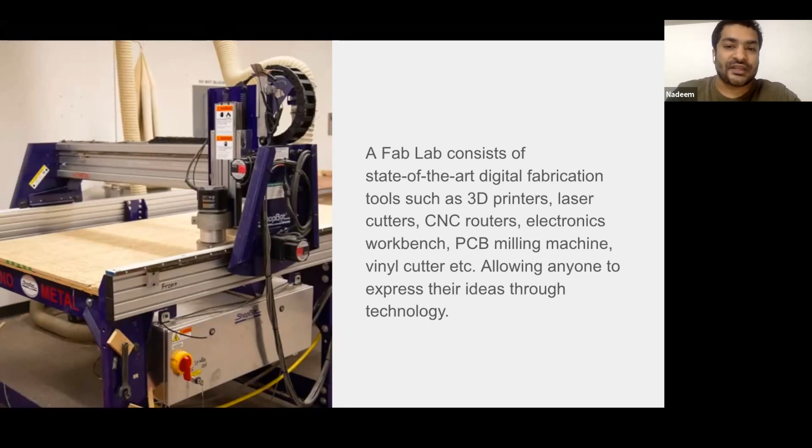As I said, the concept of Fab Lab is to take your idea, even if it's not for a commercial product or purpose. It can be anything — it can be your extra 20 hours project — and take it to Fab Lab and make it happen, make it into a real product.

As I said, we will repeatedly use the term personal fabrication, where anyone with minimal knowledge or training can come into the Fab Lab and make their idea into a prototype. As you may know, there are 1,750 Fab Labs around the globe right now, and each year it is growing exponentially.

Coming to our facility, Fab Lab Kerala — Fab Lab Kerala is an initiative by Kerala Startup Mission, which is a government nodal agency by the Kerala government to support startups. Coming to the network, we possess a bunch of categories of Fab Labs — we have mini Fab Lab and Super Fab Lab.

Before getting into it, let me take you through the journey of how we started Fab Lab. In 2015, in Kerala, in cities called Trivandrum and Kochi, we started two standard Fab Labs. Seeing the impact of that Fab Lab on makers, innovators, and startups, the government planned to extend the facility to 22 mini Fab Labs, which are right now in engineering colleges and polytechnics. It acts as a distribution hub for all the Fab Labs, and is also geographically distributed.

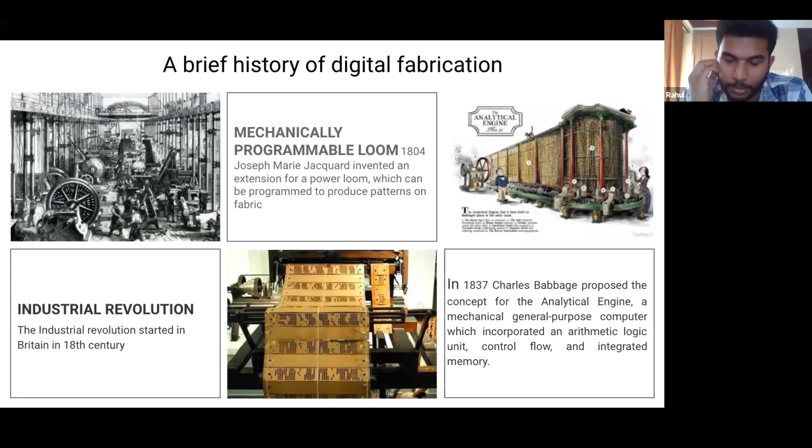Okay, so from Charles Babbage, who proposed the analytical engine, after some time in the 1800s, 1896 actually, Herman Hollerith realized that the holes punched on these punch cards could represent abstract information which could be stored electrically. So this is the first time electrical design, electronics, got involved in the running of machines. He went on to make the Hollerith tabulating machine, which later became IBM. So now the machines can be programmed and they can interact with humans.

Why not let the machines do the work for us? So that's why in 1949, in the Servomechanisms Laboratory at MIT, you can see the first milling machine, which was invented by John Parsons. During World War II, the aircraft components were getting increasingly complicated, so complex that even the most skilled person could not accurately make these curves. So what they did was tie a computer to a CNC milling machine.

Basically, the computer would read out information from a card and send pulses to the machine, and the machine would move in steps according to the pulse. So this was the first computerized milling machine there. And the first of these CAM softwares, as we know them right now, were called ATPs, automatically programmed tools. Now we've come a long way since then. Next slide, please.

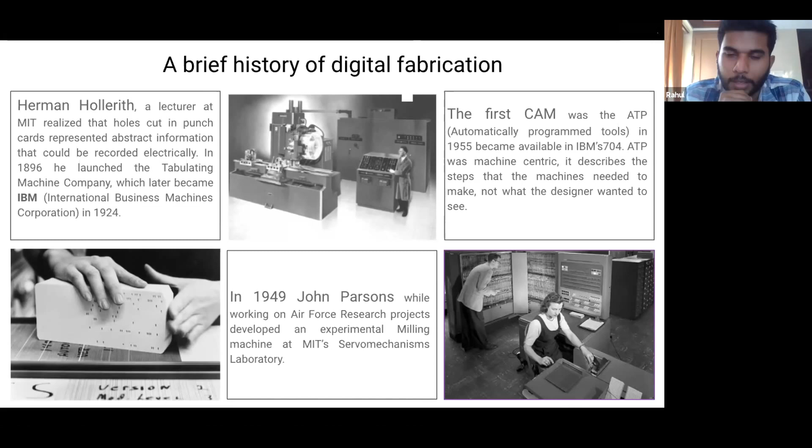So we jumped quite a lot in this picture from the automatically programmed tools, in which the last problem that occurred was: now that computers can take in information and move machines, how do we tell the machine what to do and where to go? That's where the entire CAM, or computer-aided manufacturing, process workflow comes from. In the 20th century, we crossed that threshold into digital fabrication. Basically, the entire workflow of designing and fabricating has gone into the digital realm. You're drawing on the computer, it processes that into machine code, and another computer runs the machine.

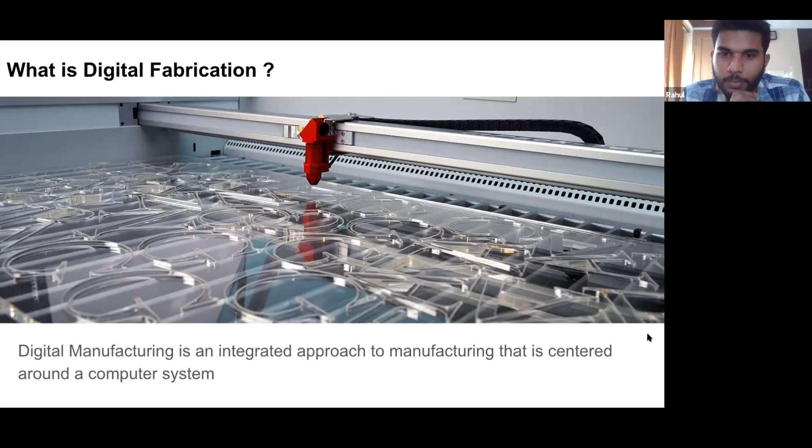In our present century, there are multitudes of tools controlled by computers. Look at any CNC machine and think of it like this: it's a machine that can move in certain axes, like X, Y, and Z, or the three rotational axes, and there's a computer to control it. What we put as the end effector, or the tool, defines what the machine is doing. It could be a 3D printer, a laser cutter, or a milling machine. So all these machines can be broken down into motion systems and things to control those motion systems.

The normal commercially available tools we have right now include the CNC milling machine, which has a rotating tool that can cut through wood or any material. Then we have laser cutting, which focuses a very tiny beam of light into the material to cut it out. So these are the two subtractive processes. The one that came very recently is additive manufacturing, in the realm of 3D printing, where you're not taking away parts, you're actually adding to it. This allows a whole new realm of possibilities, like creating impossible structures not possible by milling or other methods.

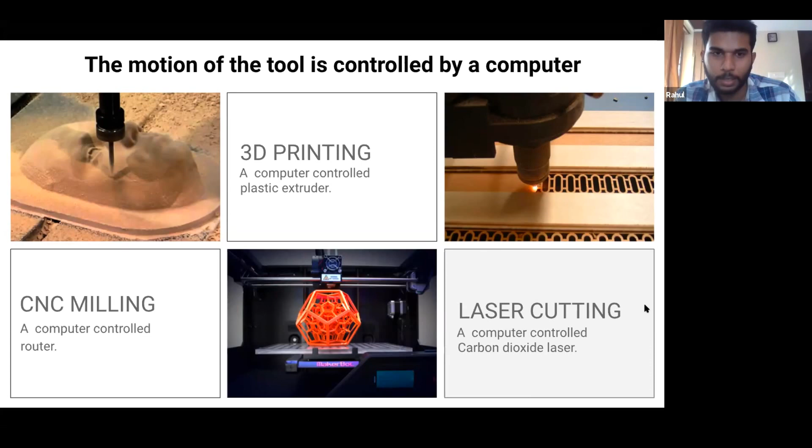These are the most common machines and manufacturing processes in rapid prototyping that we have right now. We're going to go over the machines later, but let me give you a brief of what these can do. 3D printing comes under the realm of additive manufacturing. Laser cutting is cutting by a focused beam of light.

Robotic machining can be additive as well as subtractive. There are people building rocket fuselage cones by 3D printing using a robotic arm, and there are building construction companies using robotic arms. So basically the robotic arm is just a motion system—depending on the type of tool you attach to it, you can do different kinds of jobs. A CNC machine, everybody knows that one.

The last one is water jet machining. Water jet machining actually started as a rough cutting process in the 1980s, but since the software technology has come a long way, we can actually predict the path of the water, so it's very accurate right now. It wasn't accurate until very recently, but now we can use very fine tolerances close to CNC milling tolerances with the water jet. Then there's atomic force microscopy, which comes in the realm of electron beam collisions, but I don't think it's practical for us.

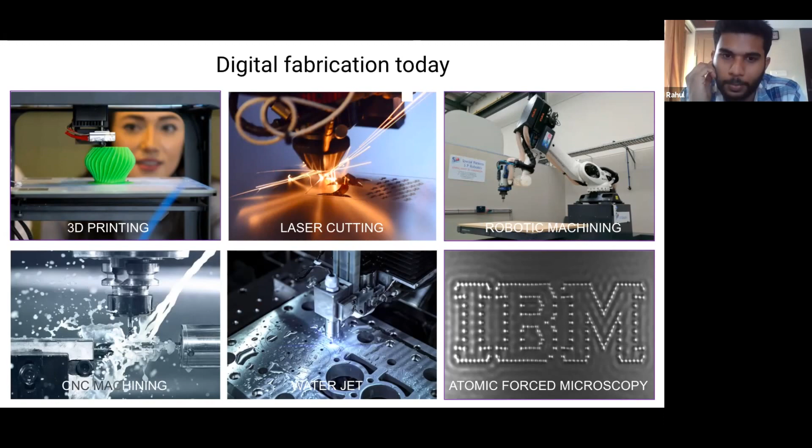So how are we going to tie all of this together? All of these machines are chosen in such a way that people with very minimal training can operate them. You only need access to a computer and some design skills, and there are softwares which can convert the design into machine code. So every year, from January till July, we run a course called the Principles and Applications of Digital Fabrication. This is globally known as the Fab Academy. There are more than 200, about 250, labs participating every year, and it happens from January till July.

In this course you're going to learn—we'll get into the details later, but roughly you're going to learn 3D printing, CNC machining, laser cutting. Also, what you can take out of this course is that you'll be able to see any kind of electronic equipment or any kind of physical product, and you'll be able to deconstruct all the steps.

Like this is made by this manufacturing, this is made by this. So if you have an idea you'd like to express and you want to do that through technology, then this is a course for you.

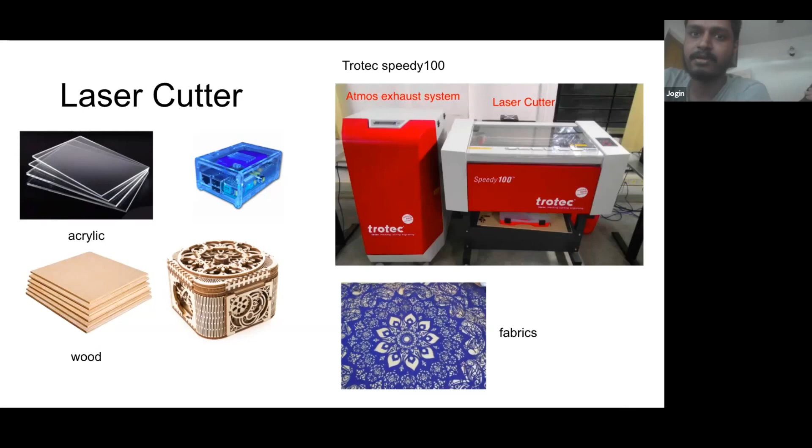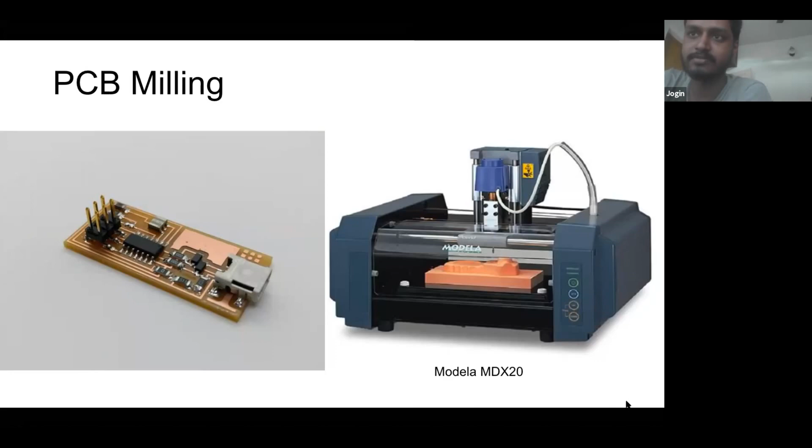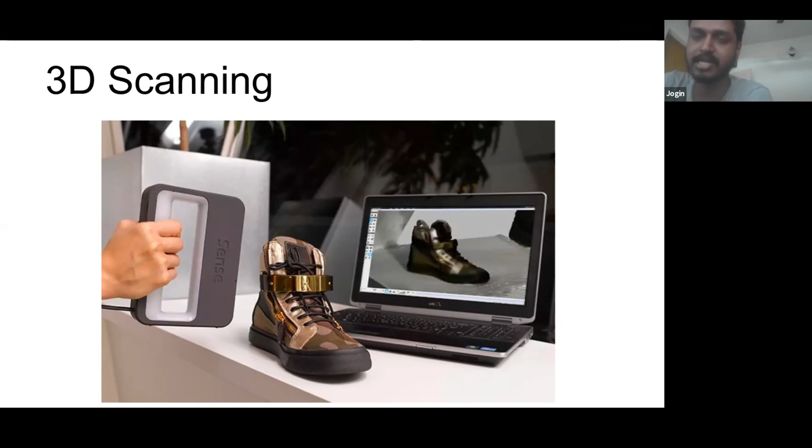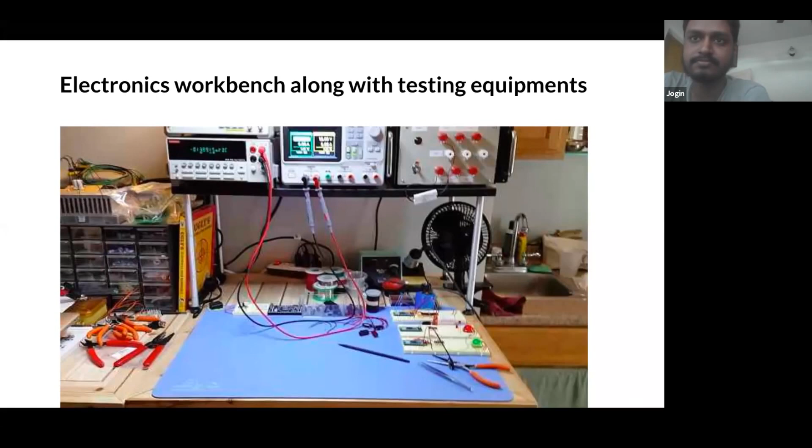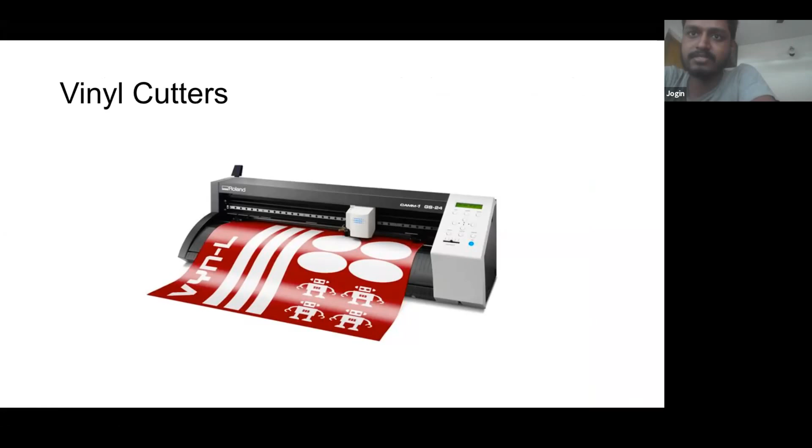So these are the basic machines that we have in our mini Fab Lab.

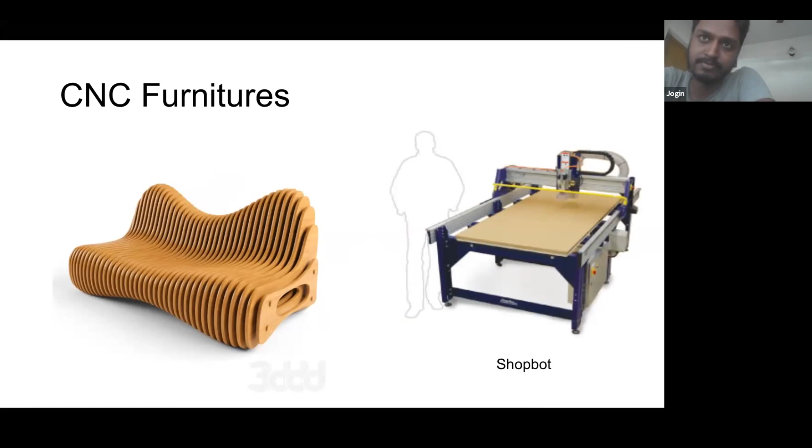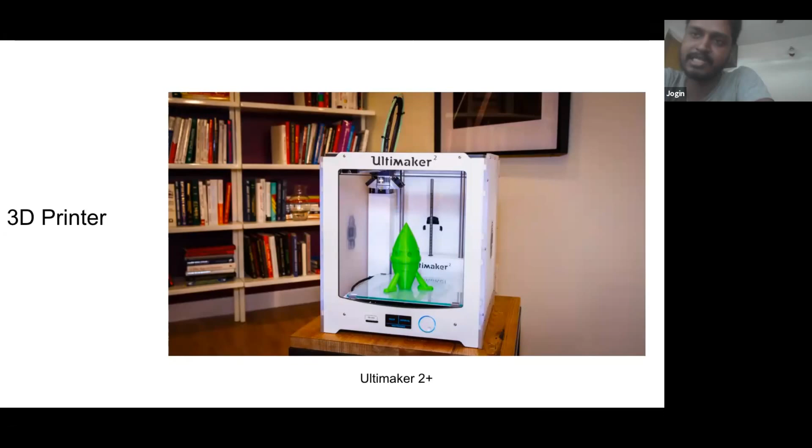Of course, there is a 3D printer, but that's just a basic 3D printer. This is a FDM type 3D printer, and it has got around 20 cm by 20 cm bed size, and can print just prototypes, what we call casings, etc. So this is a fused deposition modeling type 3D printer, and the material that we use is PLA.

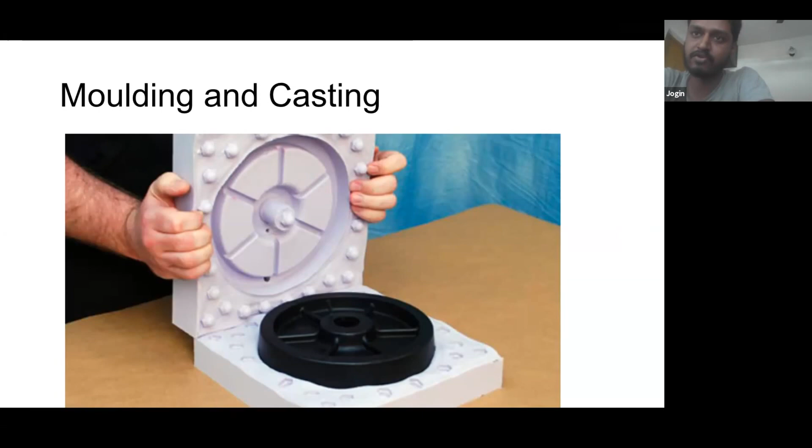Along with that, we have a facility with an inventory we could use. As I said earlier, we have a ShopBot for making what we call the molds, and we can use that mold to cast in our molding and casting facility. We have all kinds of resins, epoxies, etc. for making a mold or an output product.

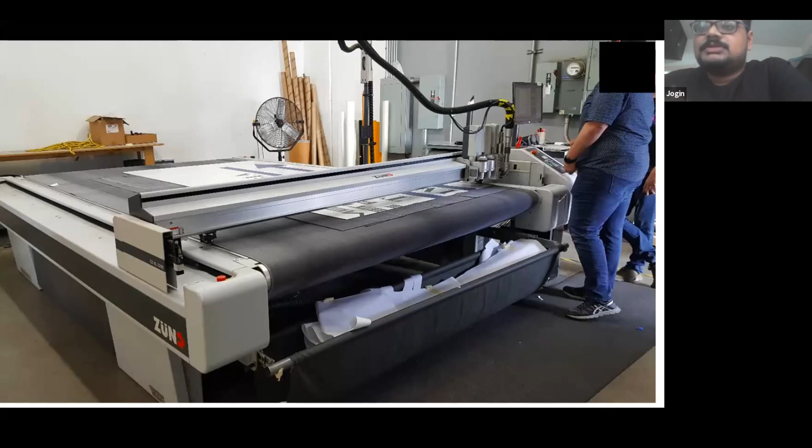This is called the Zund, a Swiss machine which is very capable in cutting. It's a subtractive manufacturing machine, meaning it subtracts material from the stock. One major advantage of the Zund is that it can have multiple modules inserted in the same machine. One module could be a routing module, which can route wood or plastic. One could be a creasing module, which can crease cardboard and make right angle bends. And one module could be a cutting module, which can cut cardboard, fabric, fiberglass or carbon fiber. The bed continuously feeds so we can input rolls of material like vinyl and fabric. This is a super fast machine.

The machine can accelerate up to 2 meters per second, which is super fast. The applications of these machines are usually for cutting plastics for enclosures or functional parts, cutting fabric for any purpose, cutting fiberglass, and most importantly for making packages out of cardboard and carton boxes, which can also be used for creating cardboard furniture. Rahul was working on some awesome ideas for cardboard furniture, but unfortunately we couldn't show it because we are not in the lab.

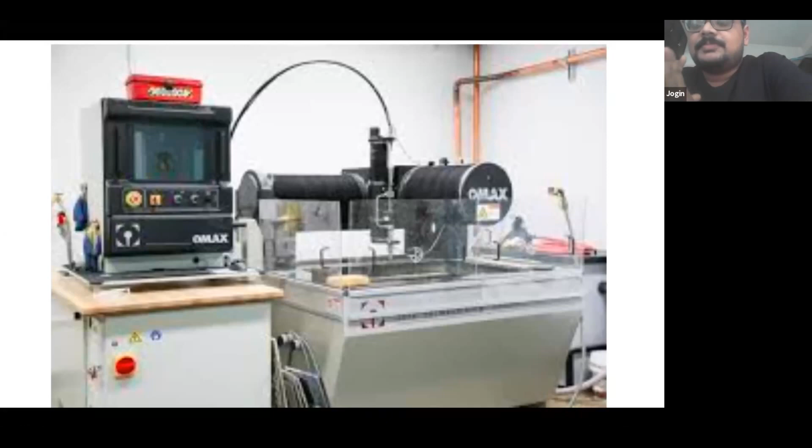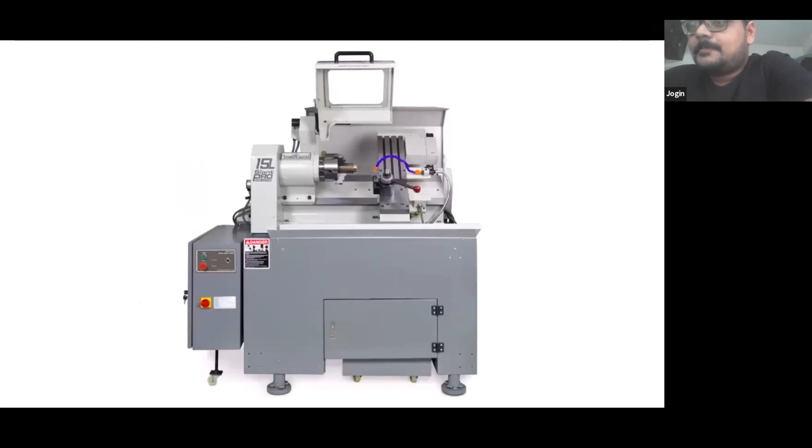Okay, next slide. This is actually a 2-axis CNC lathe. In the Fab Lab we have this small lathe for creating small parts, small shafts and flanges for connecting. This is a computer controlled CNC machine so you can add complex geometries inside the lathe pattern. In conventional lathing, you need to manually move the 2 axes by hand, but this is CNC controlled - you can directly input your CAD profile to the machine and it will automatically cut those patterns. Okay, go to the next.

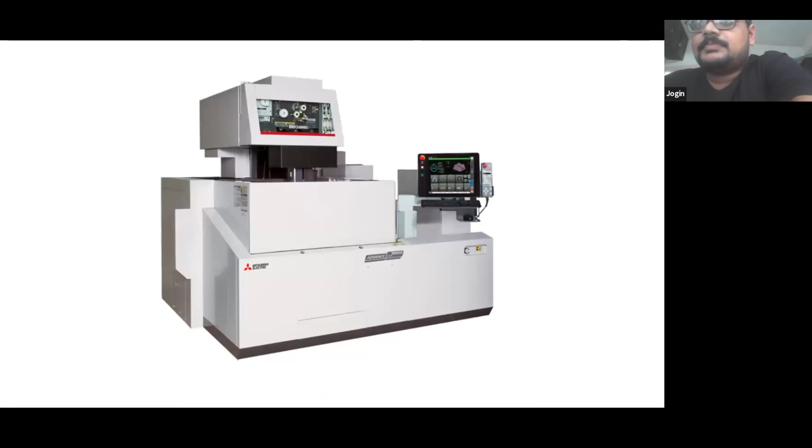So this is actually a wire EDM machine. I hope you might have heard about a wire EDM. So this is actually an electrical discharge machining tool.

There will be a high voltage conductor, and that conductor will act as the cutting tool. Whenever the conductor approaches the stock material, it creates an electric arc and creates plasma. The plasma will etch the material out of the stock material, and it creates a cutting profile on the stock material. So one of the disadvantages of a wire EDM...

comparing to the water jet is that you need to pre-drill the hole in order to get the wire inside the stock material.

Other than this, it's a pretty good machine because in water jet you have the problem of tapering, but since in wire EDM you are using a uniform wire, the accuracy you are getting will be independent of the height. So if you are cutting a 1mm sheet, or you are cutting a few centimeters height of sheet, the accuracy will be the same, because you are using a wire, and the wire will be etching from the stock material. So yes, move to the next slide.

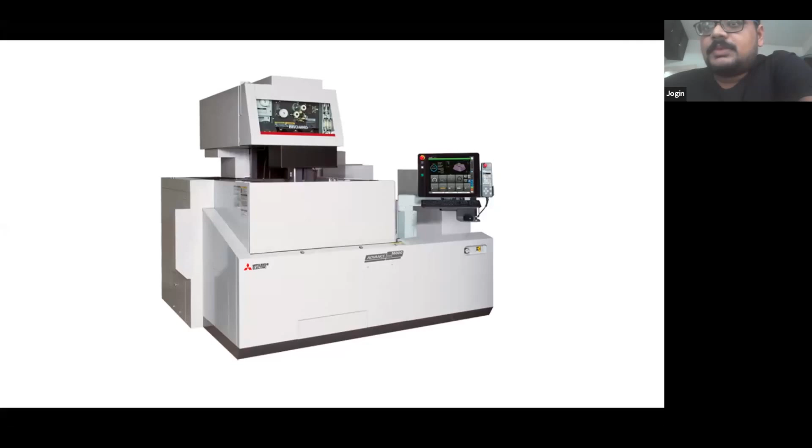Hello, Jogin. We missed you in between. Rahul, can you take it from here?

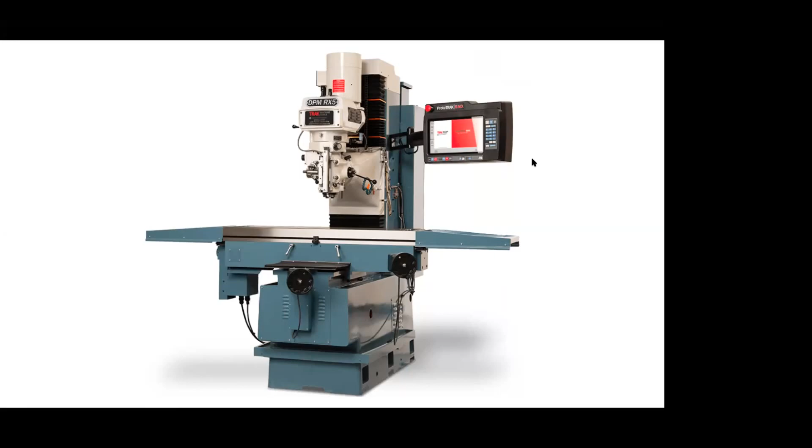Okay, so as Jogin said, this is actually a mill with an integrated DRO on it, so that we can do both manual as well as CNC operations on it, like basic CNC work. It's not as powerful as the HAAS, but it gives you more manual room to work on it. That is basically you're working on it by hand, but you have assistance of a computer.

Okay, then maybe next.

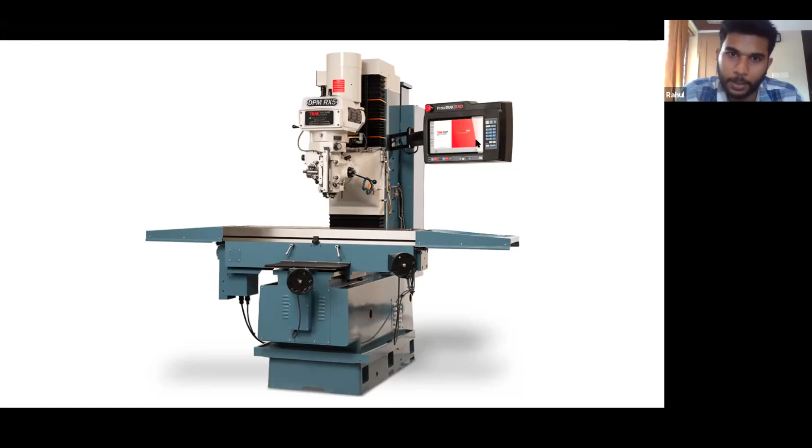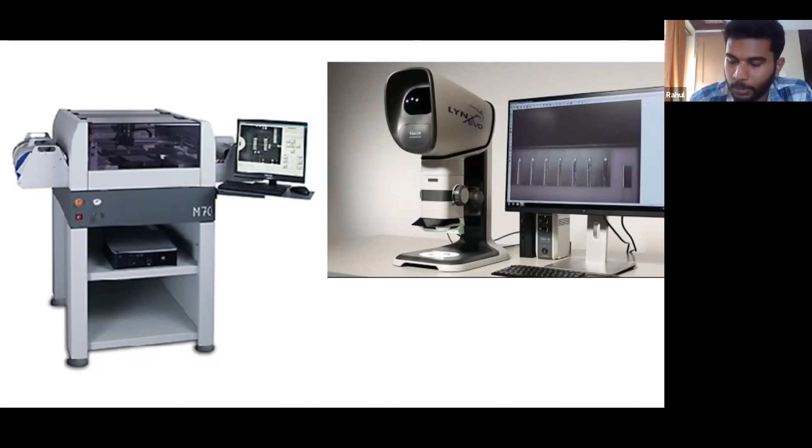Yeah, maybe next please. Yeah, so I think Jogin is back.

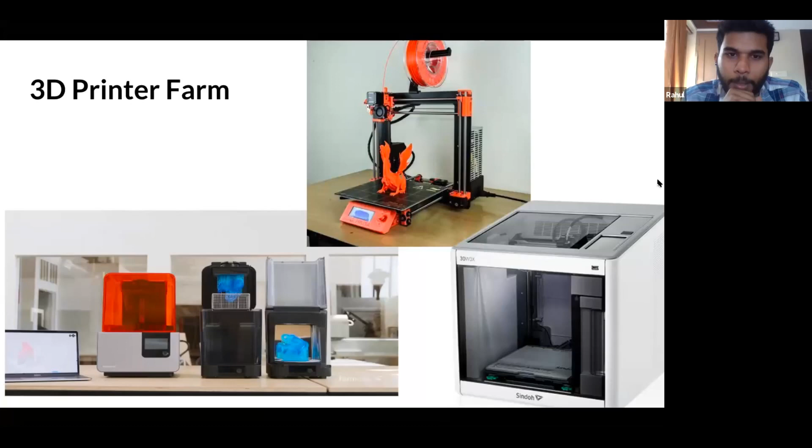So let me do one more slide. The print farm basically has Prusa Mark IIIs as well as Sindohs. Per day we have 10 of these printers, 5 Prusas and 5 Sindohs. Theoretically we have the capability to print about 240 hours of work in one day. That's the printing capacity of the entire print farm.

Apart from these regular FDM-based printers, we also have resin-based printers, that's the Formlabs on the bottom left. It's a resin-based 3D printer, and the main advantage is that the resolution is very high. You can print very small parts, and depending on the material it can be flexible or hard. So the main difference between FDM and resin is that resin has higher resolution, and you can print more complex geometry, like very thin geometries, which are only possible with resin.

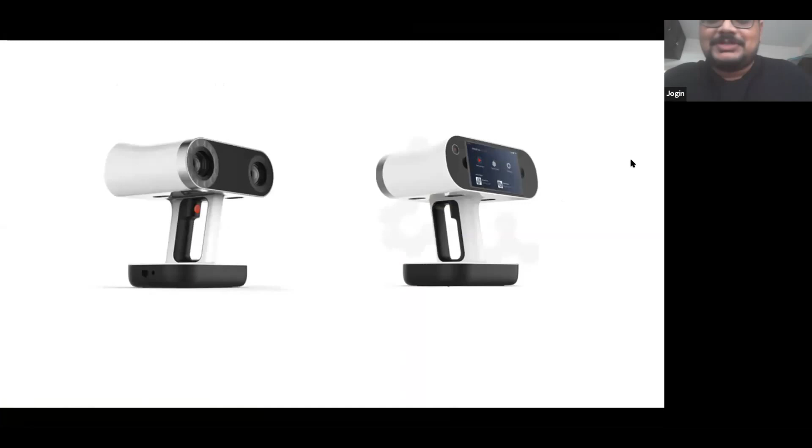This is actually a more professional 3D scanner. What we saw in the Mini Fab Lab is a sensor with almost sub-centimeter level accuracy. What we have in the Super Fab Lab is called the Artec Leo, which has sub-millimeter accuracy. You can use it for reverse engineering: you 3D scan and import into Artec Studio to reverse engineer it. There are a couple of tools already pre-built in the software, and there's a provision for exporting it to a step file also.

This is handheld, so you don't always need a computer plugged in. You can use it for 3D scanning buildings, architecture, and also automobiles. You take it as a single module and scan, and this data could be stored on an SD card or directly to the cloud, and you can post-process it later when you have the setup for servers.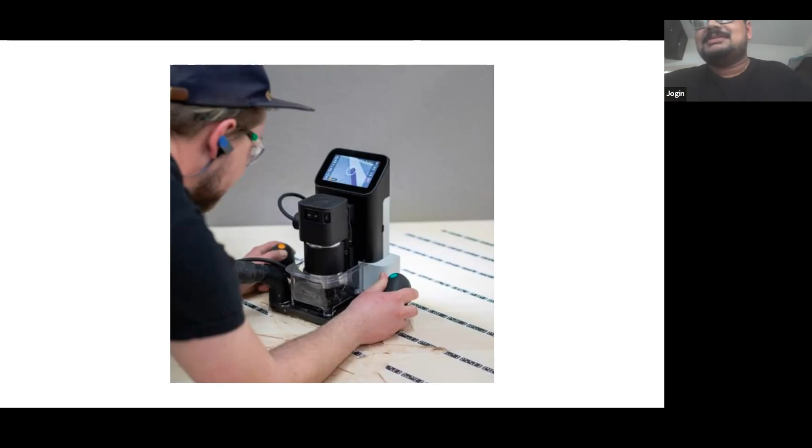Next, I hope we covered this one - we also have a woodworking area with a couple of tools: table saws, band saws, grinders, and scroll saws. These are usually for post-processing CNC-cut parts, or if you want some modification, or accidentally get rough cuts from the CNC, you can correct it with the woodworking tools. Also if you want straight cuts, you can directly use the table saw. So we have a couple of woodworking tools, which is very cool if you ask me.

Next - initially we ran the Super Fab Lab for almost 1.5 years, and we figured out this was all based on an assumption. So we asked the startups what things would be helpful if you have a manufacturing facility, and these are some results we got in the initial survey. Based on that, we purchased our initial machines. And when we ran those machines, the requirements of the startups and the community kept developing, so they needed more capabilities.

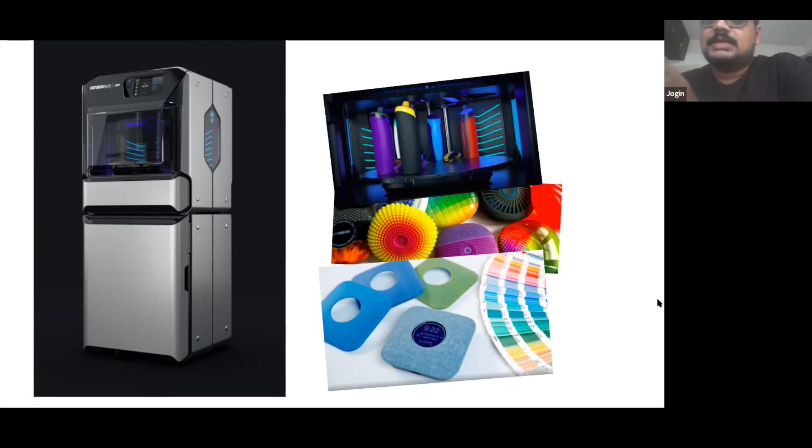This is a pretty cool machine. You can make a perfectly final prototype with these kinds of machines. You can also add flexible material so that the hinge areas or the flexible areas can all be printed in a single print.

Similarly, you can automate 3D prints. One of the advantages of having a robotic arm is that you can use it for automating things, and we are also planning on conducting workshops on this so that students and interested individuals can get hands-on with these tools and elaborate their understanding of robotics, and they can add their own custom algorithms to run the robots. I consider this a pretty cool tool.

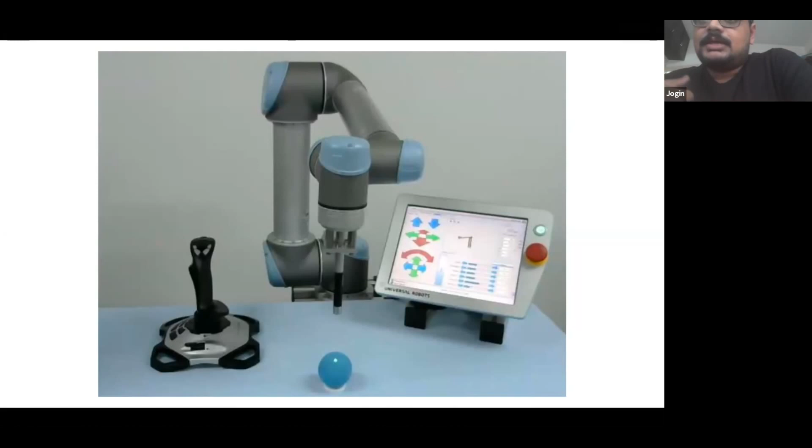It's actually sintering the powder into a form, and since it's printing in powder, you don't exactly need supports, though there should be some support in certain scenarios, but usually you don't need supports for these kinds of printers. It can print in nylon, and considering the engineering properties, nylon is pretty good for developing products. You can also print volumetrically so that you can nest parts inside the entire volume. If you're using an FDM, you only have to put your components on the bed, but if you're using a powder-based printer, you can nest it all over the volume.

This is a 4-axis laser cutter, which means it has 3 quadrature axes and 1 rotational axis. The rotational axis could be used for cutting pipes and cutting patterns in tubes or pipes. You can also cut stainless steel up to 6mm.

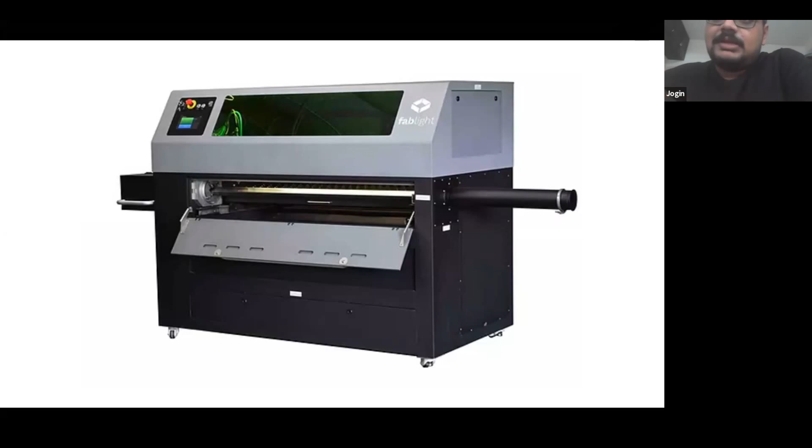One of the key features we eventually came across is that fabrication is more capable if we have a sheet metal and dedicated welding area. So a lot of users in Fab Lab were suggesting, why can't you come up with a welding and sheet metal workspace, which will be difficult because you don't have that much freedom when you go to a shop and ask a guy at the shop to do whatever you want to do. There will be some limitations, they might be busy at that time, so they don't have the opportunity to properly support you.

So what we are thinking to establish in Fab Lab is a facility to try out your ideas with the freedom of your time. The welding and sheet metal workspace will be great for that. You can do sheet metal bending, cutting, punching, and welding, all sort of activities. These are some of the few priority things we are considering this year.